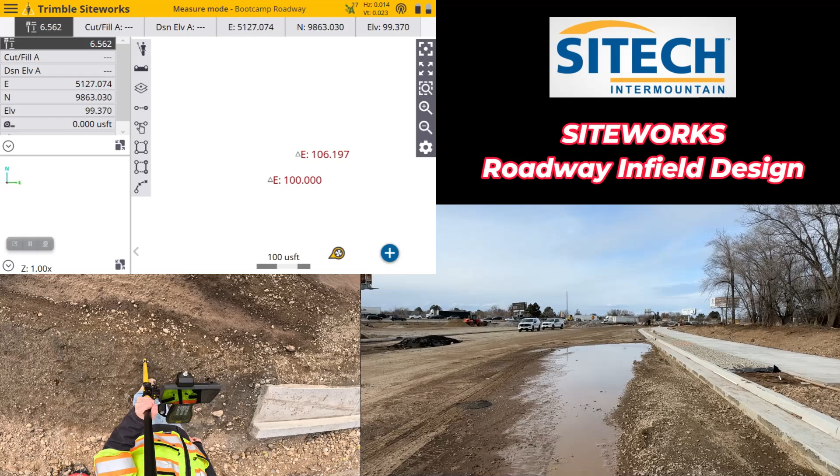So we've got curb and gutter in, and we're about ready to lay some road base in here. We just need to broadcast from our edge of pavement line and figure out where our crown line is. We know it's 2%, and we've got a 55-foot road, so we're going to do 27.5 feet to get right to the center. So we're going to shoot this lip of curb so we can figure out what that height is.

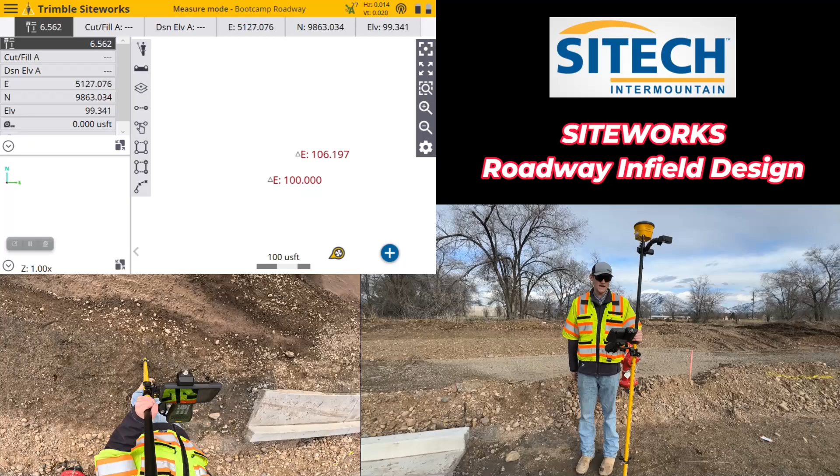To get started, we're going to configure a couple of settings here on the screen. First, we're going to go under the roller stuck in the mud icon, that measure type settings. We're going to make sure that we have the line type set to a break line, and the line name I'm going to call the edge of pavement right through here. So hit accept on that, make sure that's going.

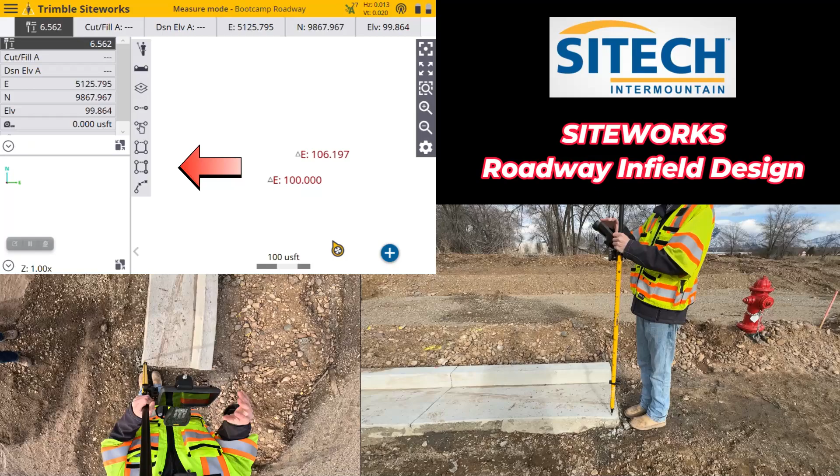Then we're going to do our offset line settings. That is the second icon from the bottom over here on this gray taskbar, the first square that we see. In there we can configure these horizontal offset settings. So I'm going to do 27.5 feet, which is halfway through the road. The horizontal offset direction is all based on which direction we're traveling as we're shooting it. So I'm going this way, I want that crown line off to the left, so I'll have it set to the left-hand side.

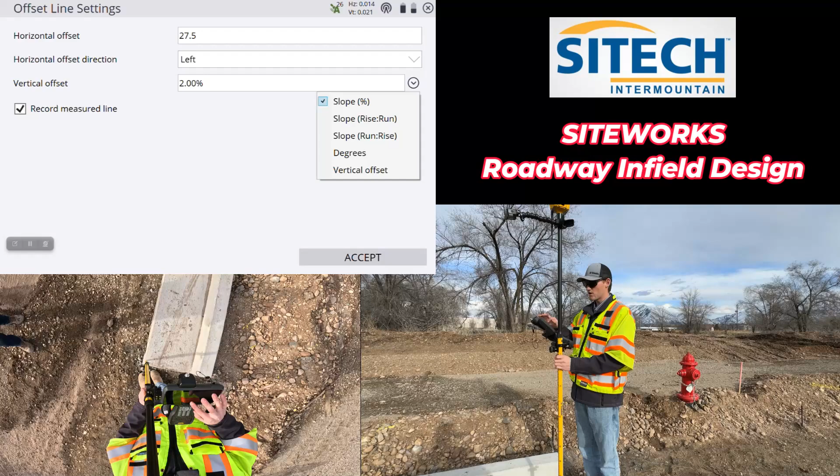The vertical offset, how far up or down I want it to be, the set of plans call out for a 2%. So we're going to do 2% to that crown line. If we needed to put in a raw vertical offset number, this drop-down menu right there will allow us to do that, and then we'll just hit accept and get ready to go.

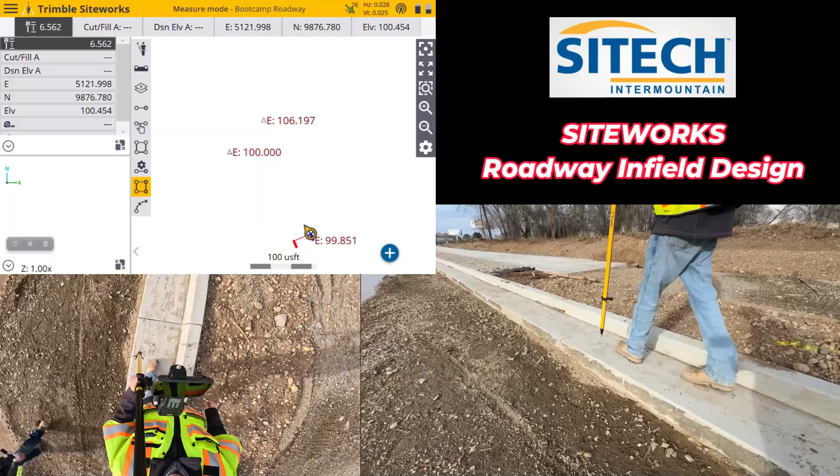I'm just going to make sure I get my pole right up close to the edge before the concrete starts to roll off, and I'm just going to start shooting a line right there. As we move along on the screen, we'll notice that we've got a blue line, which is us, and a red line, which is that offset line, that horizontal offset line of that 2%. So every so often through this curb line, I'm going to get a couple of shots. I'm going to pay attention as best I can to any grade break changes or flow in the curb.

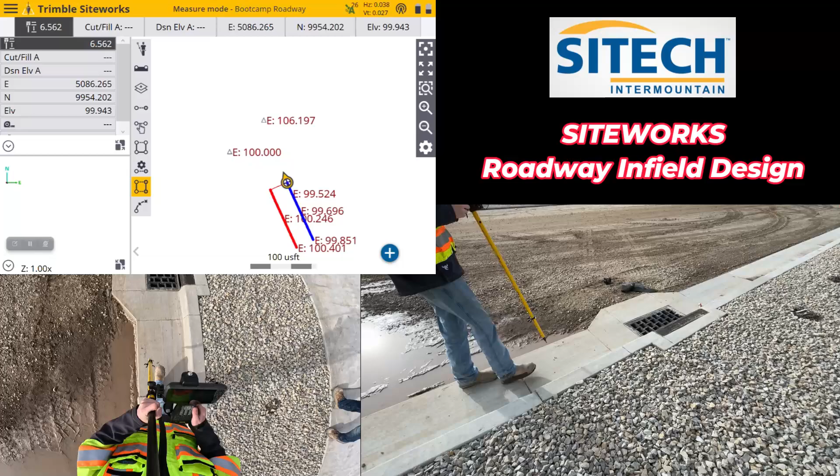This one's pretty consistent, so I'll shoot every so often through those joints, get down to this drain box. I'm not going to branch out and around on this concrete. I'm going to go straight through because I want my horizontal offset line to be straight out in the center. So I'll get out to this other edge, take another shot, and I'm just going to continue on all the way down this curb line.

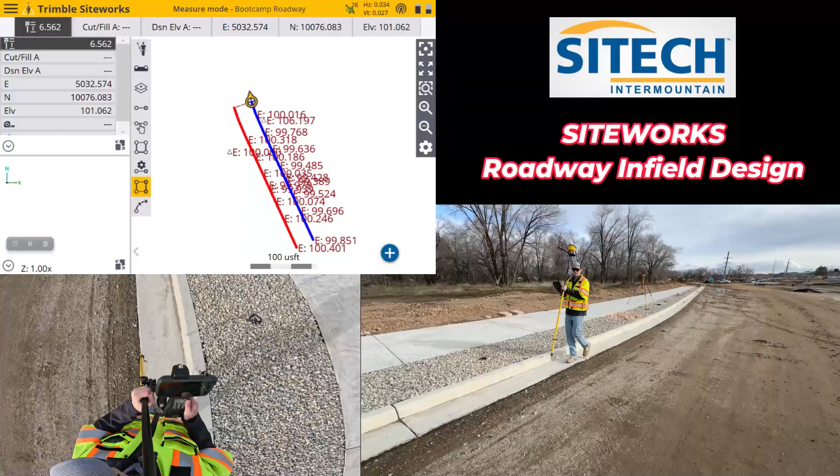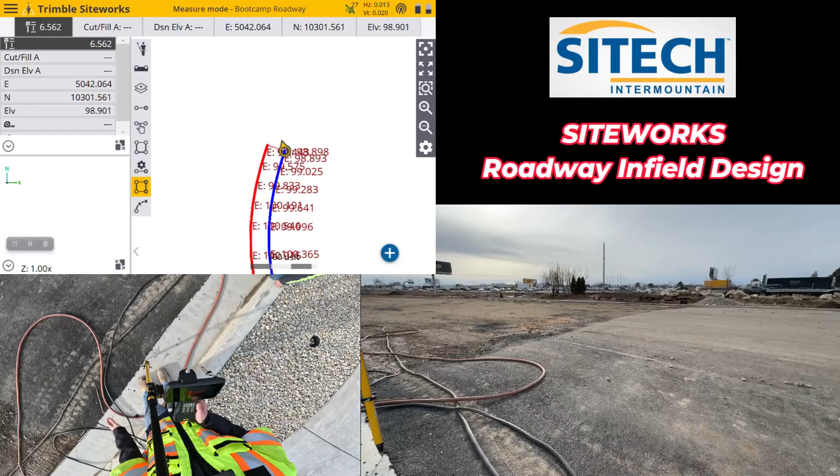So getting towards the end of my run, I'm just going to go a little bit past my asphalt and take another shot, just in case we have to saw cut this line a little bit further back. We know we've overbuilt our design, so we have plenty to grade up to.

So now I'm done measuring this line. I'm ready to jump to the other side of the road. Just need to stop measuring these two lines. To do that, I'm going to hit my menu bar and go down to just measure. Hit measure. Those colored lines now turn black. We're stopped measuring those ones. Now we're just going to jump to the other side.

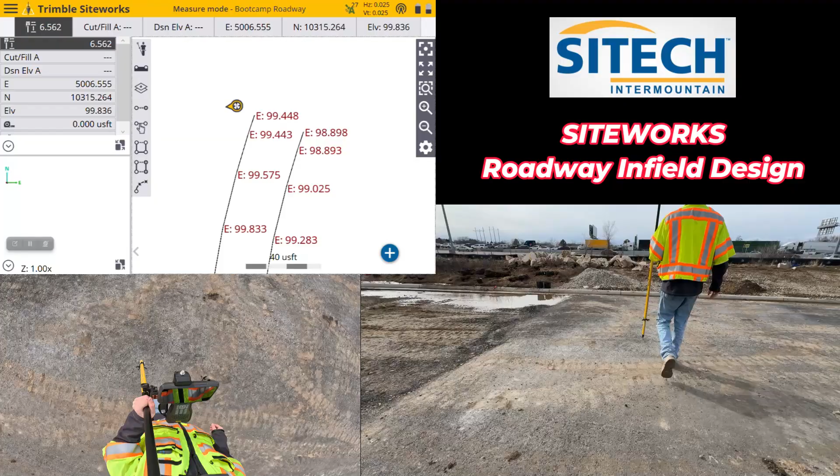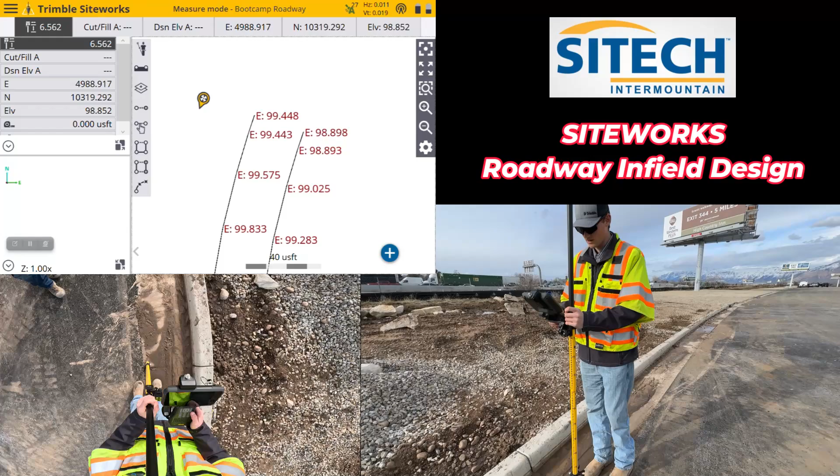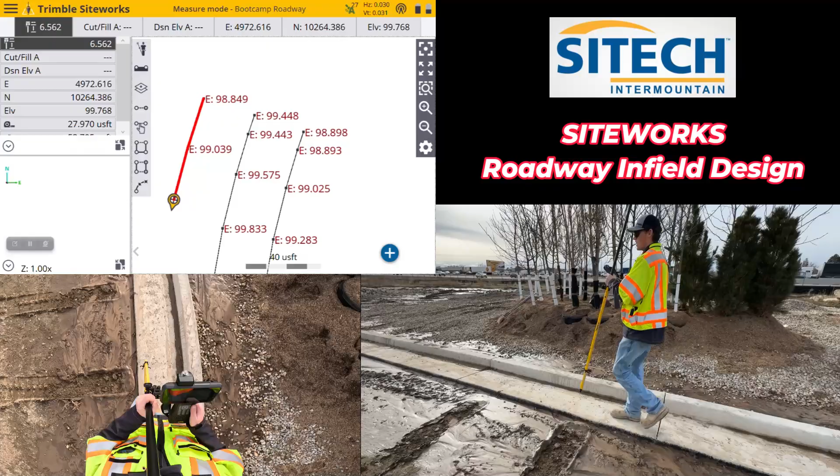Again, we're going to just stay a little bit behind the asphalt just in case for that saw cut. We're going to start measuring a new line. We'll start measuring this one every so often, all the way back. We did calculate that the right-hand side, or the first side that we did, was a little bit higher in some cases than this side. So that's the side we used for our crown line, because we didn't want one shallow side and one high side.

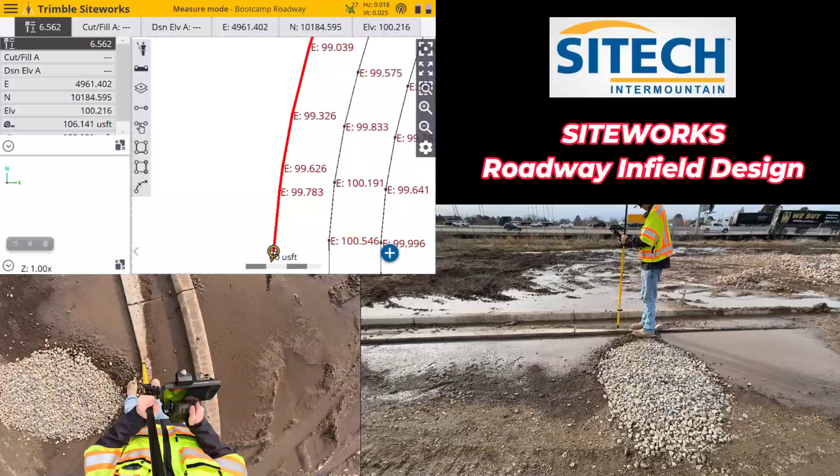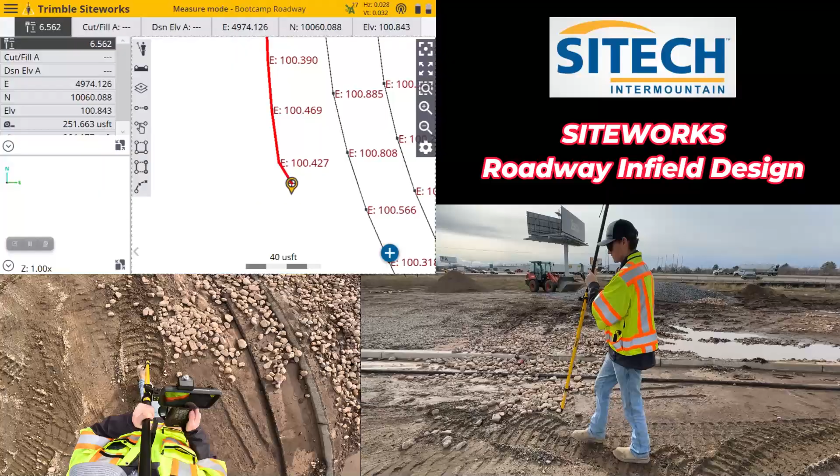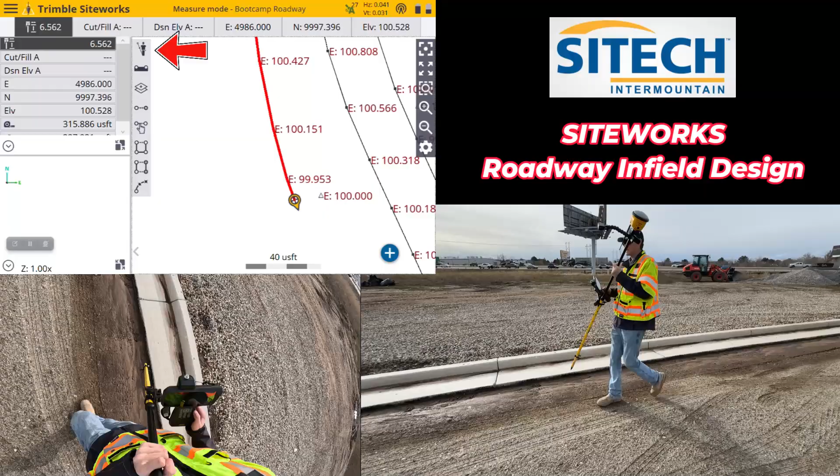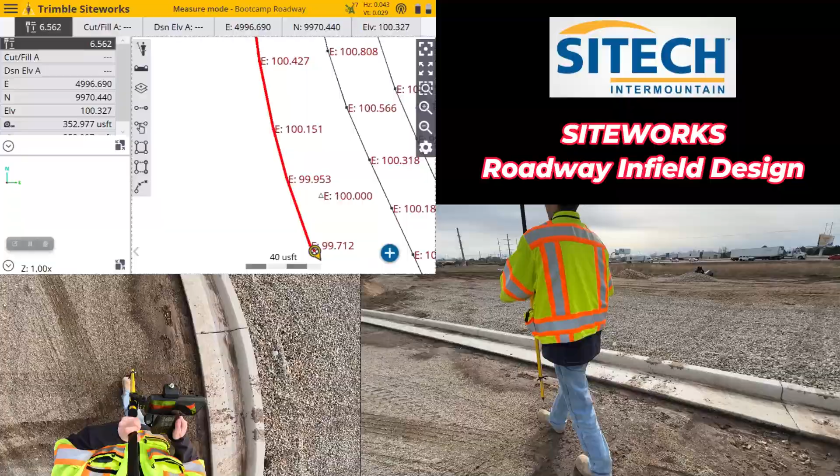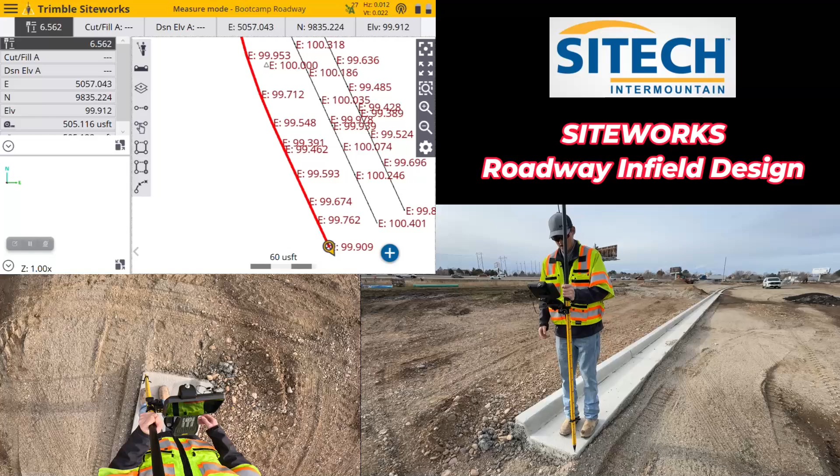All the way out here where I'm ready to end, take my shot. Again, to stop measuring that line, I'm going to go Menu, Measure. That's going to go from red to now that solid black.

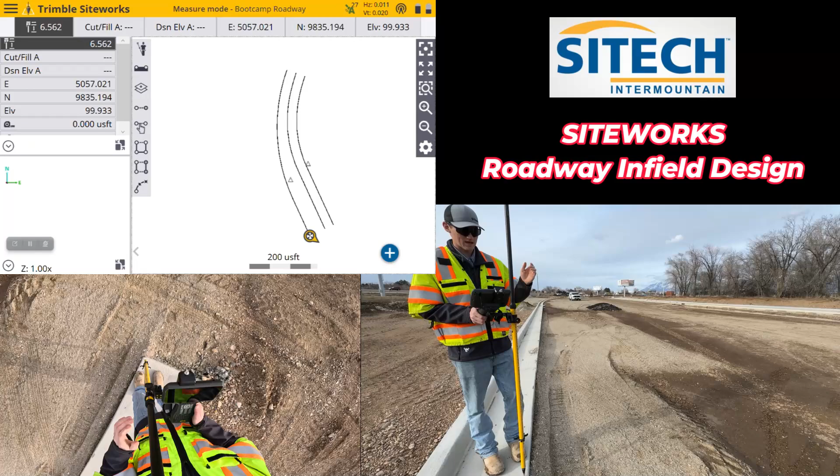I've got this new roadway that I've created. Looks like this end branches out into this turn lane a little bit, so you can see the difference in length across there. So that side was more accurate for height, as well as getting to where my crown line needed to end up. So all that's left now is to surface this as a design.

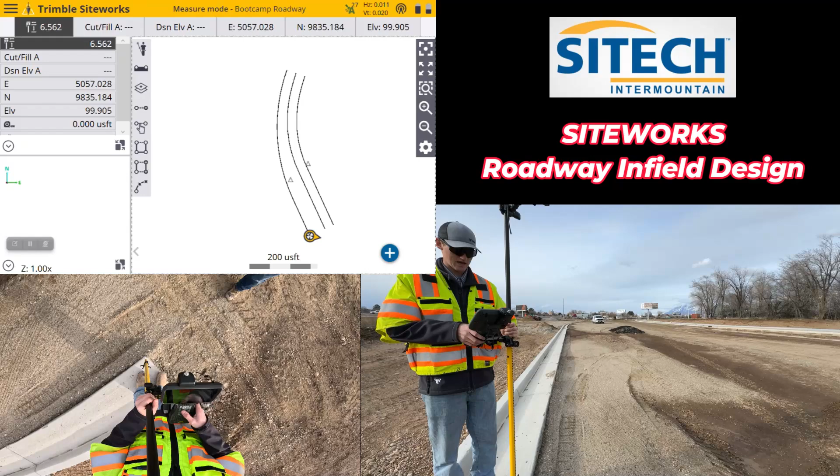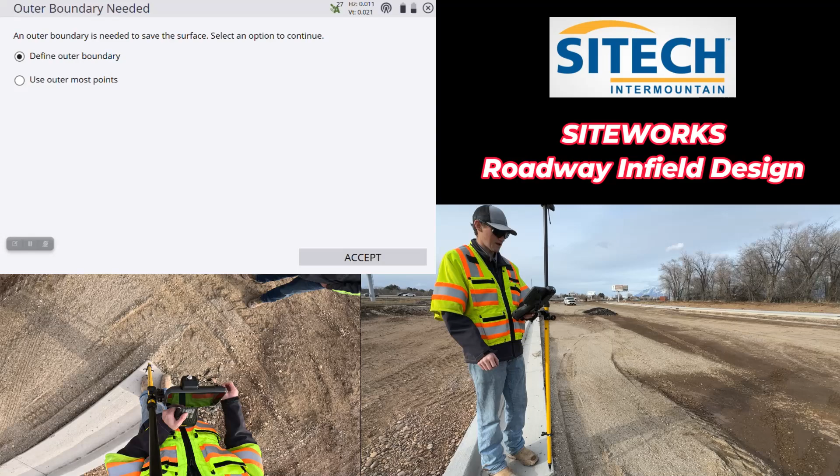So I'm going to go under the hamburger menu, go down to the data management tab, under surface as design, and then I'm going to give this a new design name. So this is my roadway version 1, in case I make changes in the future. This line work, I'm going to include measured line work, hit accept. In this case, I'm going to use outermost points, hit accept, and it's going to save that design.

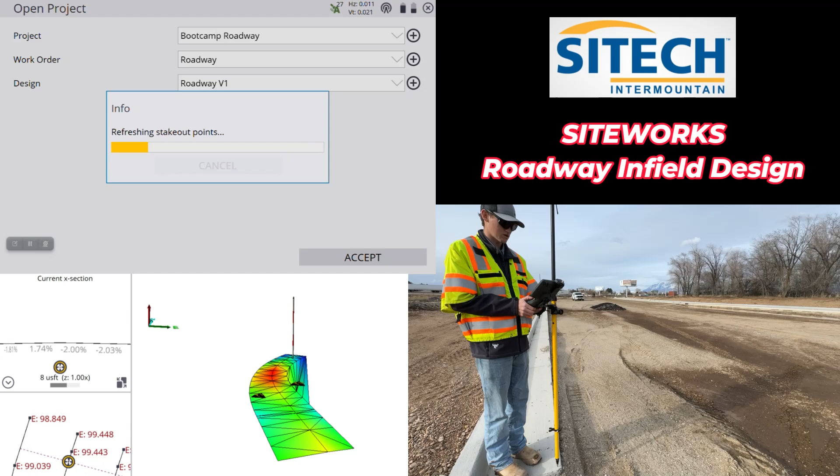It's not yet loaded on my data collector, so again, I'm going to go Menu, Project Setup, Change Project. Under this Design tab, I have a new design, that roadway version 1, and hit accept to load that onto my screen. And now I can go ahead and go check grade.